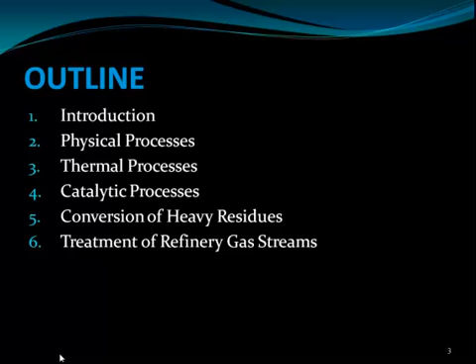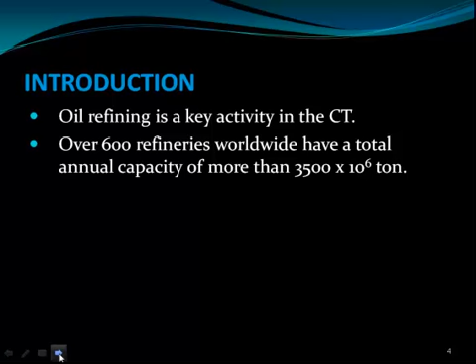Coming to the introduction, oil refining is the key activity in chemical technology, and petroleum is one of the key products. Over 600 refineries worldwide have a total annual capacity of more than 3,500 × 10^6 tons.

The goal of oil refining is twofold. It includes the production of fuels for transportation like petrol and diesel, power generation and heating. Power generation is mainly by burning petroleum products, and heating is required in colder countries. The second is the production of raw materials for chemical technology.

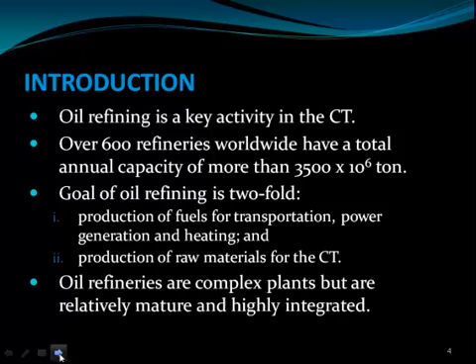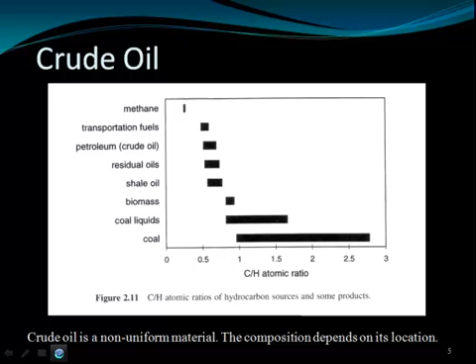Oil refineries are complex plants but are relatively mature and highly integrated. Today technology has advanced so that we can handle very heavy crudes and get more products from the oil refinery. If we look at the carbon to hydrogen atomic ratio, methane is very low whereas coal is very high. Petroleum or crude oils have around 0.5 to 1 carbon to hydrogen ratio. So the carbon to hydrogen ratio should be considered for this energy property.

Next come the constituents of petroleum. Generally the majority of crude oil is alkanes, then cycloalkanes like naphthenes, then aromatics, polycyclic aromatics, and sulfur containing compounds. Gasoline, or petrol, mainly consists of branched alkanes, and diesel mainly has linear alkanes. So among alkanes we have normal alkanes and branched alkanes.

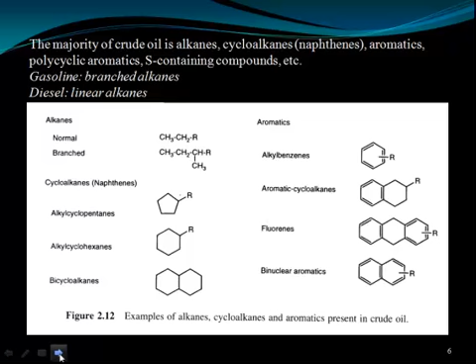The aromatics have the benzene ring, and depending upon the number of benzene rings they are further divided, like alkyl benzenes, aromatic cycloalkanes, fluorenes, and binuclear aromatics. So different kinds of products, mainly aromatic and non-aromatic, that is aliphatic, are present in the crude oil.

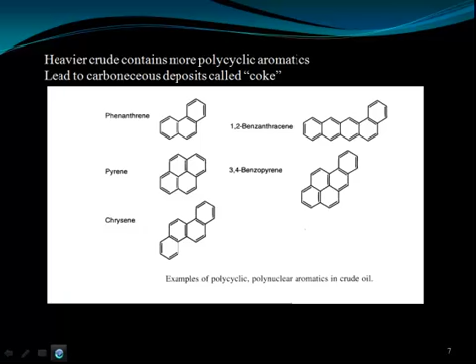Heavier crude oil means higher molecular weight and more polycyclic, polynuclear aromatic compounds, for example phenanthrene, pyrene and chrysene. The heavier crude contains more polycyclic aromatics, and it leads to a carbonaceous deposit called coke. When we burn petroleum, the black soot that remains behind is termed coke in the petroleum industry.

Some crudes contain a lot of sulfur, which leads to processing considerations. Sulfur is a content we generally don't want, and processes are done to remove it from petroleum. The main sulfur compound is hydrogen sulfide, a gas which we can remove easily, but others like cyclic sulfides, disulfides or substituted dibenzothiophenes are difficult to remove. These require the hydrodesulfurization process, where hydrogen is used to remove the sulfur, and the final product is hydrogen sulfide, containing the sulfur removed from the crude oil.

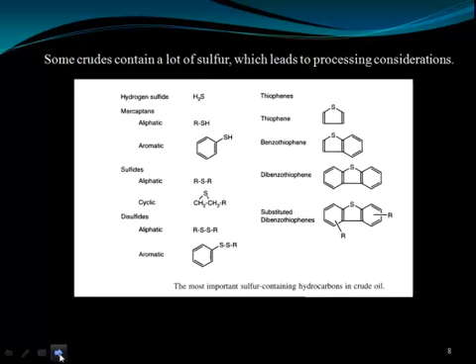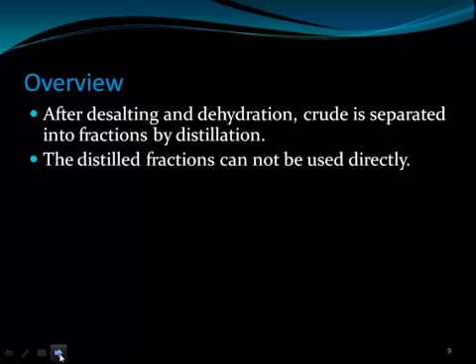Then if we see the overview of the petroleum industry, after desalting and dehydration, crude is separated into fractions by distillation, and the distillate fractions cannot be used directly. The reason for such a complex setup process is the difference between crude oil properties and the needs of the market. Another reason for complexity is environmental. Legislation demands cleaner products and is the major drive for process improvement and development of novel processes.

So desalting, where we remove the salt by filtration, and dehydration, removing the water. Then we separate into the fractions by distillation. So we will see the distillation. What does it mean? The product should be manufactured so that it will have a good demand in market, and it should be sellable in the market. To achieve that, different processes are adopted, which will make the crude oil more adaptable to market conditions.

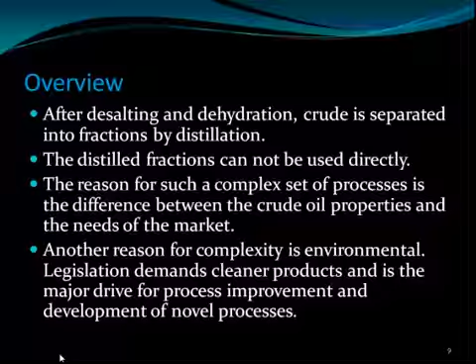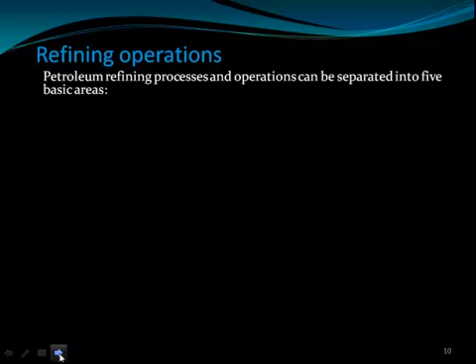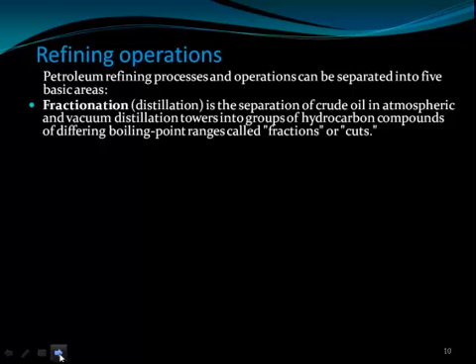In the refining operations, petroleum refining processes and operations can be separated into 5 basic areas. One being the fractionation or the distillation. Here it is the separation of crude oil in atmospheric and vacuum distillation towers into groups of hydrocarbon compounds of differing boiling point ranges called fractions or cuts. The crude oil which comes will separate into different categories or boiling point ranges, generally as petrol, diesel, kerosene, naphtha. These are termed fractions or cuts.

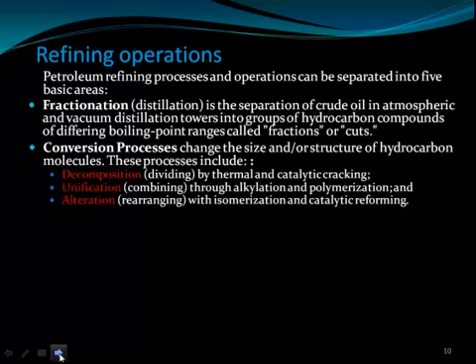The next being the conversion processes. Here we change the size or the structure of hydrocarbon molecules. These processes include decomposition or dividing by thermal and catalytic cracking, then unification, the combining through alkylation and polymerization, and alteration or rearranging with isomerization and catalytic reforming.

Then the treatment processes to prepare hydrocarbon streams for additional processing and to prepare finished products. Treatment may include the removal or separation of aromatics and naphthenes, impurities and undesirable contaminants. The treatment may involve chemical or physical separation like dissolving, absorption or precipitation using a variety of combinations of processes including desalting, drying, hydrodesulfurizing, solvent refining, sweetening, solvent extraction and solvent dewaxing.

So here the things are the fractionation, then conversion and the final treatment or finishing process. In finishing, desalting, drying, hydrodesulfurizing, solvent refining, sweetening, solvent extraction and solvent dewaxing. These are the refining operations that we will discuss in detail in the further slides.

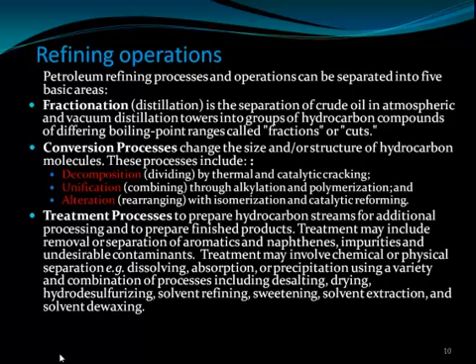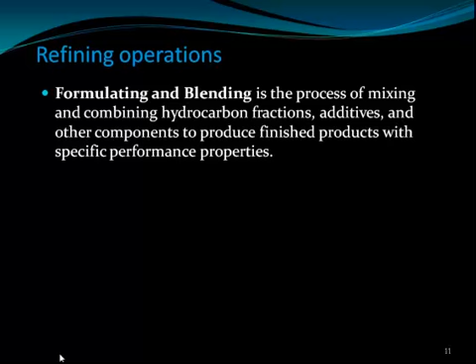In a refining operation, the next thing that comes is formulating and blending. After the treatment process, the products we get, we are formulating and then blending. It is a process of mixing and combining hydrocarbon fractions, additives and other components to produce finished products with specific performance properties. Then other refining operations include light ends recovery, then sour water stripping.

Sour is generally used for the sulfur content. Then solid waste, process water and wastewater treatment, cooling, storage and handling and product movement, then hydrogen production, acid and tail gas treatment, and the last one is sulfur recovery.

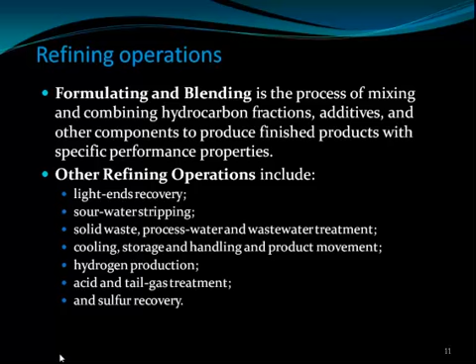The next thing in the refining operation is the auxiliary operations and facilities, which include steam and power generation, process and fire water systems, flares and relief systems, furnaces and heaters, pumps and valves, supply of steam, air, nitrogen and other plant gases, alarms and sensors, noise and pollution controls, sampling, testing, inspecting and laboratory, the control room, maintenance and the administrative facilities.

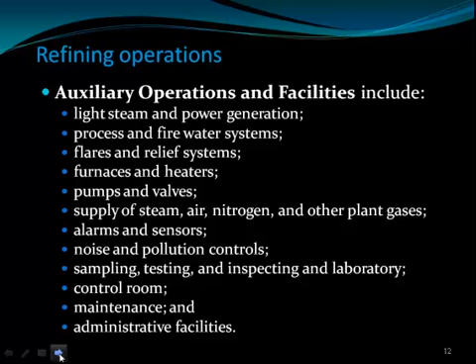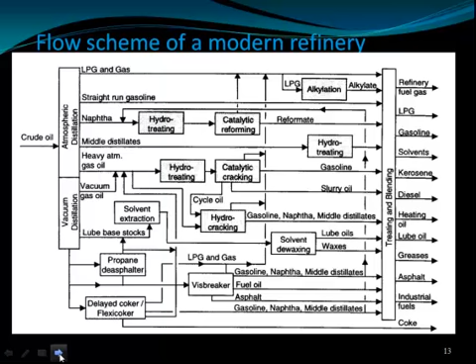So the refinery is a very complex structure where the raw material is one, crude oil, but the outcoming products are very various. This is one of the simple schemes shown here for the refinery. The flow scheme may become very complex depending upon the crude oil composition. If the crude oil is not of good quality, then many other processes have to be included in order to purify it and to get good products of our desired demand.

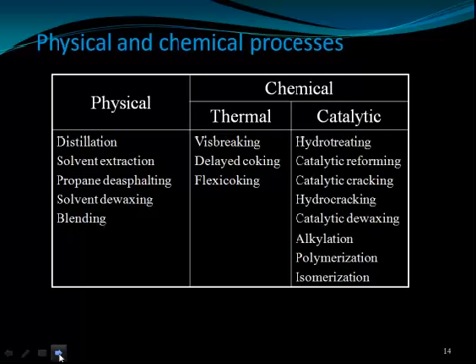There are different chemical and physical processes. Physical processes mainly involve distillation, solvent extraction, propane deasphalting, solvent dewaxing and blending. Chemical we can further divide into thermal and catalytic. Thermal will be visbreaking, delayed coking, flexicoking. In catalytic we have hydrotreating, catalytic reforming, catalytic cracking, hydrocracking, catalytic dewaxing, alkylation, polymerization and isomerization.

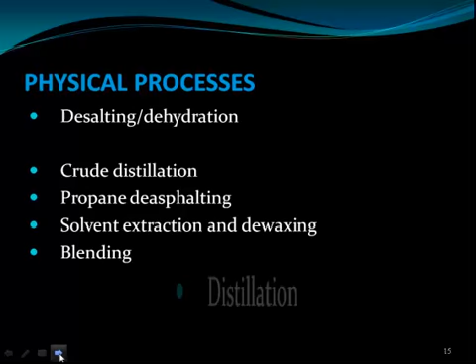Physical processes include distillation. Here we have desalting and dehydration, crude distillation, propane deasphalting, solvent extraction and blending that we have seen. In this one, distillation is the major one that we have to discuss in detail.

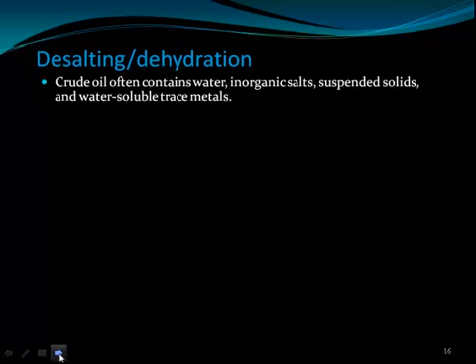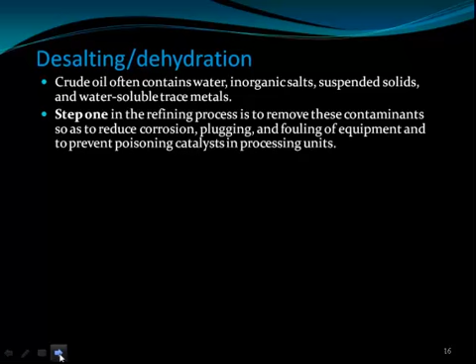As far as desalting and dehydration is concerned, crude oil often contains water, inorganic salt, suspended solids, and water soluble trace metals. Step 1 in the refining process is to remove these contaminants so as to reduce corrosion due to the salts, plugging and fouling of equipment, and to prevent poisoning of catalysts in the processing units. The two most typical methods of crude oil desalting are chemical and electrostatic separation, and both use hot water as the extraction agent.

Most chemicals are water soluble, so we can remove them with the help of water, and if they are ionized we can use electrostatic separation to separate them. So in chemical desalting, water and chemical surfactants like demulsifiers are added to the crude, which is heated so that salts and other impurities dissolve or attach to the water and then held in a tank to settle out.

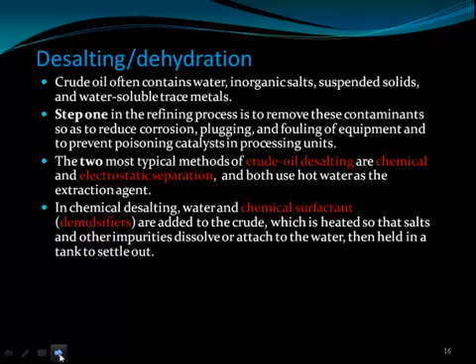Electrical desalting is the application of high voltage electrostatic charges to concentrate suspended water globules in the bottoms of the settling tank. Surfactants are added only when the crude has a large amount of suspended solids. Desalting and dehydration is prior to distillation, where salts, solids and other water soluble trace metals are removed by physical methods in order to avoid problems later. A third, rarer process filters hot crude using diatomaceous earth to remove suspended solids.

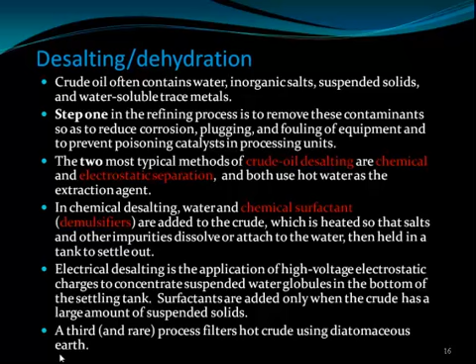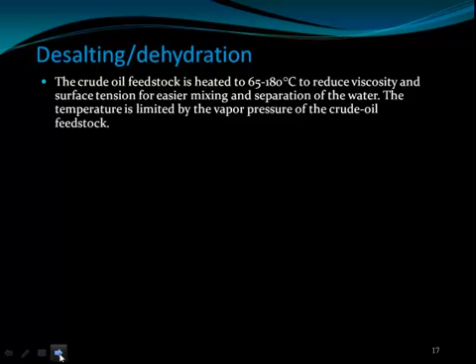We then have the operation which will heat the crude oil feedstock to around 65 to 180 degrees centigrade in order to reduce the viscosity and surface tension for easier mixing and separation of the water. The temperature is limited by the vapor pressure of the crude oil feedstock. So if the crude oil has higher viscosity, we can heat it to a higher temperature to reduce the viscosity, which will make the mixing operation easier.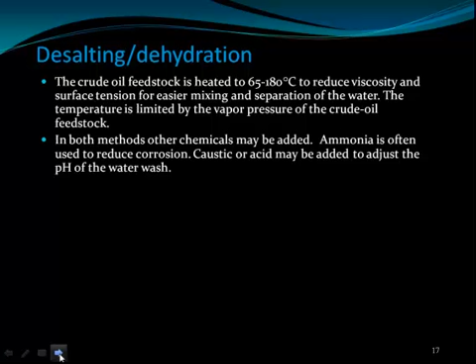In both methods other chemicals may be added, like ammonia, which is often added to reduce corrosion. Then caustic or acid may be added to adjust the pH of the water wash.

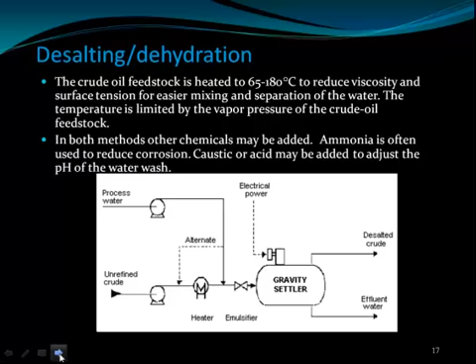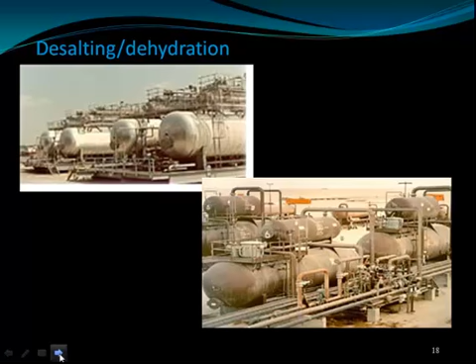So if we see over here, the unrefined crude and water come in. It is heated previously in order to lower the viscosity. Then emulsifiers are added, and then it goes to the gravity settlers where water and crude oil are settled. Then the desalted crude goes to the plant. Here you can see the pictures of the gravity tank settlers - these are round cylindrical tanks in which we allow the crude oil and impurities to settle. They separate by means of their physical gravity differences, and we can get the crude and water separated.

The next step in refining is distillation. Distillation is done after the desalting and dehydration. It is defined as a process in which a liquid or vapor mixture of two or more substances is separated into its component fractions of desired purity by the application and removal of heat.

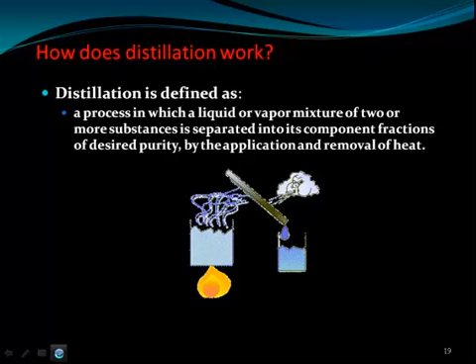Distillation is something you are very familiar with. If you heat something, it will go into the vapor phase, and that vapor when cooled down will give water. Generally this is done to purify water. If water contains some salt impurities, we heat it, so only the water evaporates - the salt and other compounds, having very high boiling points, will not evaporate at around 100 degrees. So water will be effectively evaporated, and then we have a condenser in which we remove the heat from it, converting it back to water that is free of salts. This is one of the purification techniques we learned in science.

The same principles are used in refining crude, but the process here is more advanced than the one discussed. Distillation is based on the fact that the vapor of a boiling mixture will be richer in the component that has the lower boiling point. So when we heat the mixture, the component with lower boiling point evaporates first, and the component with higher boiling point remains in the bottom phase.

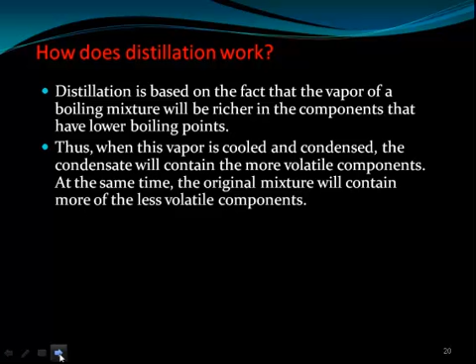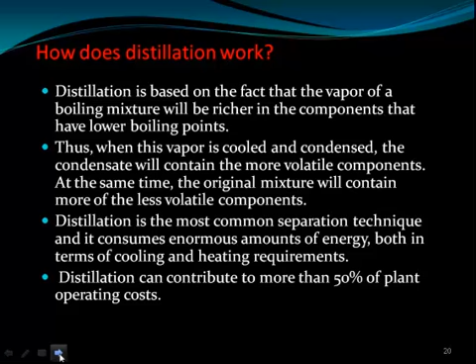When this vapor is cooled and condensed, the condensate will contain more of the volatile components, while the original mixture will contain more of the less volatile components. So the bottom product remains less volatile, whereas the upper product is more volatile. Distillation is the most common separation technique, and it consumes an enormous amount of energy, both in terms of cooling and heating. So in this process we have to do heating as well as cooling, and around 50% of the plant operating cost is spent on the distillation part.

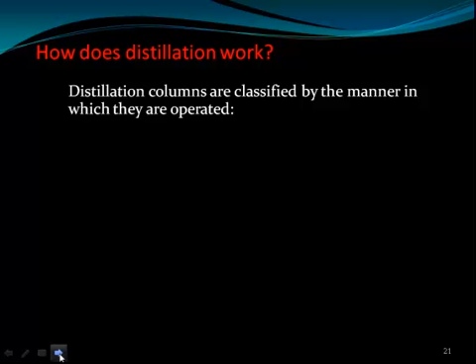Distillation columns are classified by the manner in which they are operated. They are batch wise, in which the feed of the column is introduced batch wise. The column is charged with a batch, and then the distillation process is carried out. When the desired task is achieved, the next batch of feed is introduced.

So in batch, we will get the material at once, have the distillation, and then separate the components. Whereas in the continuous process, the column processes a continuous feed stream. No interruptions occur unless there is a problem with the column or surrounding process units. They are capable of handling high throughputs and are the most common of the two types.

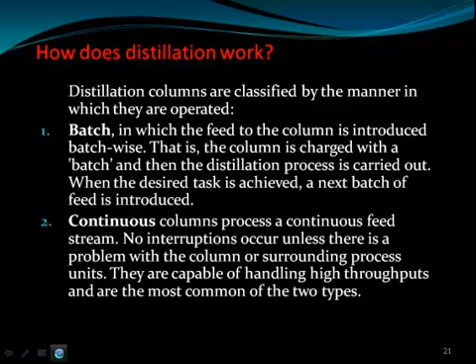So the batch will have the feed at once, whereas continuous will have continuous feeding, but the product volume will be higher in continuous, and lower in batch distillation. So most operations now are based on continuous, because they handle large volumes at one time.

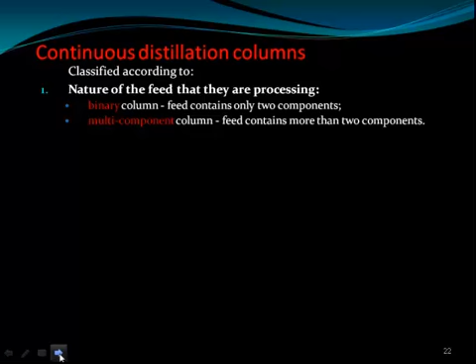They are classified into the nature of feed that they are processing, like binary columns, when the mixture is of two components, and multi-component columns, when we have more than two components to be separated through distillation. Then by the number of product streams they have, like multi-product columns have more than two product streams, where extra feed exits to help with the separation.

So they will have extractive and azeotropic distillation. In extractive distillation, the extra feed appears in the bottom product stream, whereas in azeotropic distillation, the extra feed appears at the top product stream.

In extractive distillation, we add another product which will extract the other component effectively, altering the boiling point. So generally in extractive distillation, the extra feed appears in the bottom, whereas in azeotropic distillation, we mix the azeotropic boiling mixture. Generally, it reduces the boiling point and appears at the top product stream.

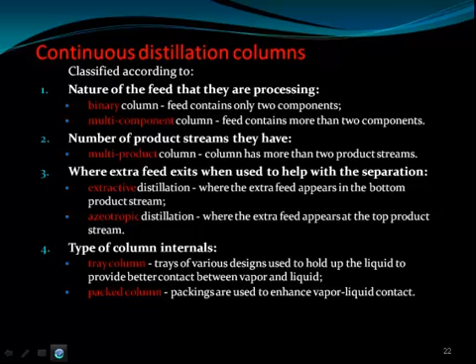Then it depends upon the type of column internals. We have the tray column, where trays of various designs are used to hold up the liquid to provide better contact between vapor and liquid, whereas in the packed column, packing is used to enhance vapor-liquid contact.

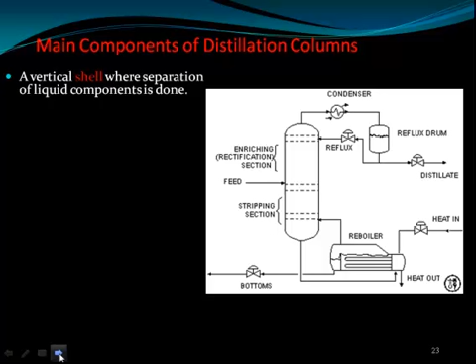So here if you see the diagram, it shows a typical refining distillation column. The vertical shell is where separation of liquid components is done. Then we have the column internals, examples being trays, plates, or packing, which are used to enhance component separation.

Then we have the reboiler to provide the necessary vaporization for the distillation process. Then the condenser to cool and condense the vapor leaving the top of the column. Then we have the reflux drum to hold condensed vapor from the top of the column, so that liquid can be recycled back to the column.

So if you see the tower, the liquid will come in, then feed is fed from the middle of the column. The reboiler will boil it to keep it continuously boiling. The more volatile component will go up in the vapor phase, and it is condensed in the condenser to get the liquid.

Then we will check the composition. If the composition is not of desired quality, we will again send it back to the column, so this reflux operation is taking place. If the product is of desired quality, then we can take it out through the distillate.

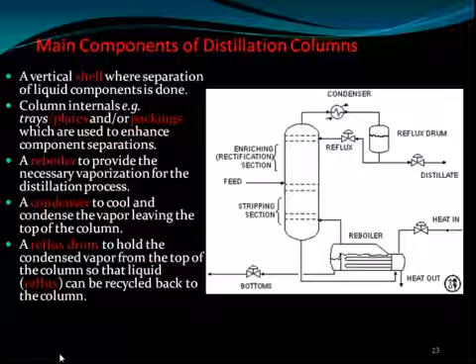Trays and plates are used in the column. In bubble cap trays, a riser or chimney is fitted over each hole and the cap covers the riser. The cap is mounted with a space to allow vapor to rise through the chimney and be directed downward by the cap, finally discharging through slots in the cap and bubbling through the liquid on the tray.

So in this one, the vapor will come up, like the whistle on a pressure cooker where the vapor lifts it up. The vapor will lift the cap and the most volatile component will remain in vapor. Suppose any component mixing has a higher boiling point, it will convert back to liquid and come down again.

This is done to ensure that the vapor has more of the volatile component, whereas the bottom has the higher boiling component. So the vapor is the key which lifts the cap up, and the liquid with the higher boiling point will again get trapped and come down.

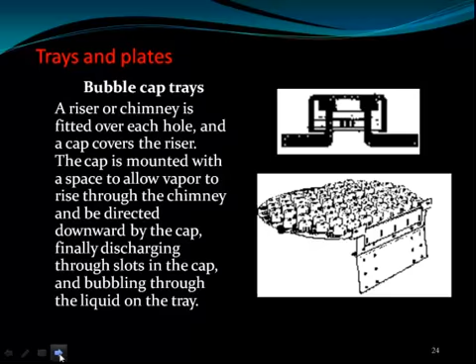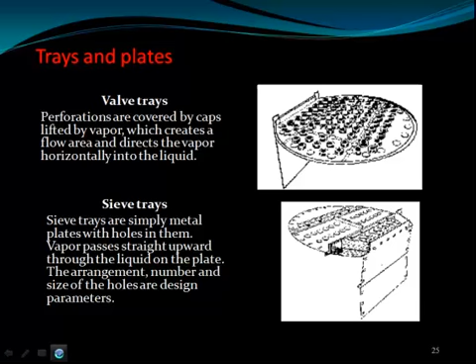Then we have the valve trays. The perforations are covered by caps lifted by vapor, which creates a flow area and directs the vapor horizontally into the liquid. Then we have the sieve trays, which are simply metal plates with holes in them. The vapor passes straight upward through the liquid on the plate. The arrangement, number, and size of holes are design parameters in this one.

If we see the design, the vapor is moving up whereas liquid is coming down. The most volatile component will push up and we find it in the upper stream, whereas the less volatile will come down. So the active tray area will serve as a barrier and will not allow the higher boiling liquid to go up. This is generally done to separate the higher boiling point and lower boiling point mixture completely, ensuring the vapor is more and more rich in the lower boiling point component, whereas the downward flow will have the higher boiling point.

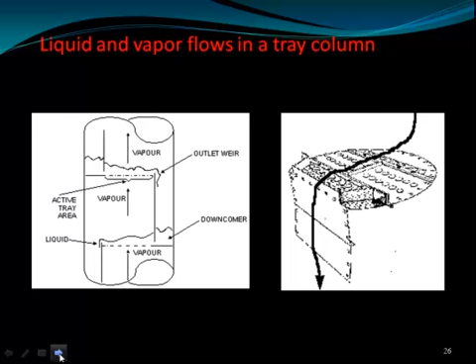In the next diagram we can see the flow of the liquid. The vapor will go up and the liquid will come through the sides of the tray.

Next, liquid and vapor flows in a tray column. Each tray has two conduits called downcomers, one on each side. Liquid falls by gravity through the downcomers from one tray to the tray below, ensuring there is always some liquid hold up on the tray, designed such that the hold up is at a suitable height, meaning the bubble caps are covered by liquid. Vapor flows up the column and is forced to pass through the liquid via the opening on each tray. The area that allows for the passage of vapor on each tray is called the active tray area.

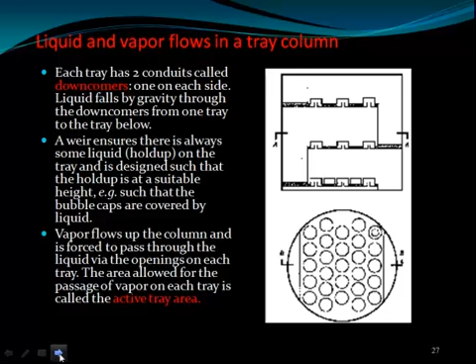Then the next thing we use is packing. As we have seen earlier in fluid mechanics lab, packings are used in fluid flow columns and packed columns. We use the same kind of packing, and nowadays we have very advanced packing which gives more contact area, which is better for effective mass transfer and good heat transfer between vapor and liquid.

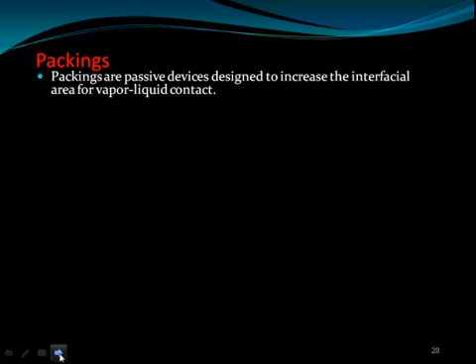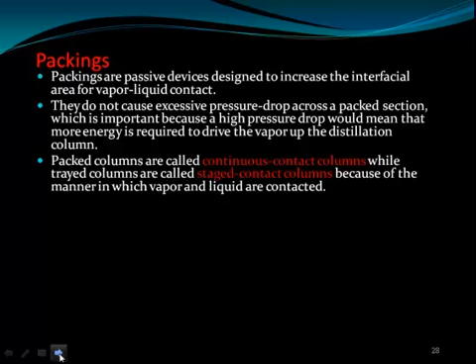Packings are passive devices designed to increase the interfacial area for vapor-liquid contact. They increase mass transfer and do not cause excessive pressure drop across the packed section, which is important because a high pressure drop would mean more energy is required to drive the vapor up the distillation column. Packed columns are called continuous contact columns, while tray columns are stage contact columns, because of the manner in which vapor and liquid are contacted.

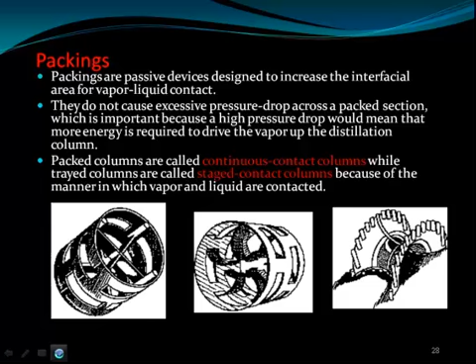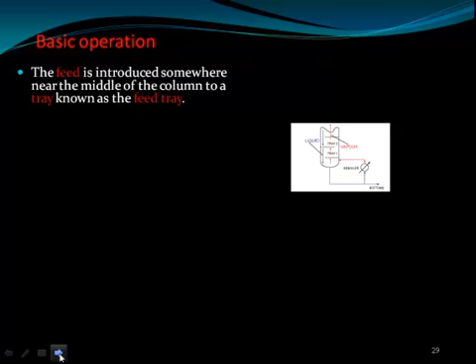The basic operation is that feed is introduced somewhere near the middle of the column, to a tray known as the feed tray. The feed tray divides the column into the top enriching or rectification section and the bottom stripping section. Since feed is in the middle, the upper portion is called the rectifying column, whereas the lower one is called the stripping column.

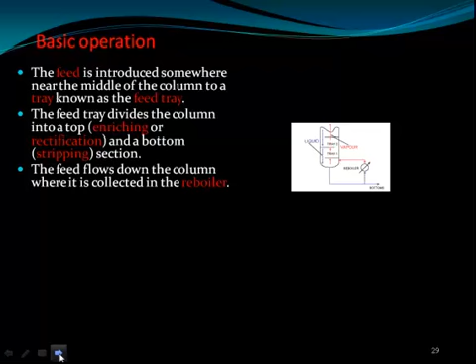The feed flows down the column where it is collected in the reboiler, and heat, usually as steam, is supplied to the reboiler to generate more and more vapor from the mixture. The vapor from the reboiler is introduced into the unit at the bottom of the column, and the liquid removed from the reboiler is known as the bottom product, or simply bottoms.

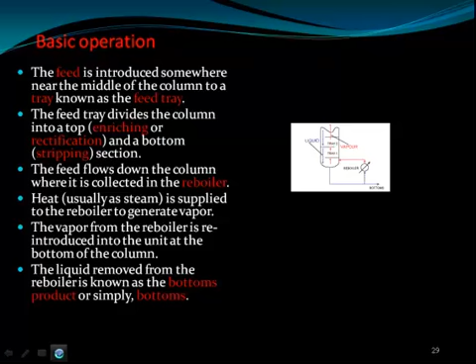The vapor coming up is passed through the condenser in order to liquefy it again, and the liquid which remains at high boiling point at the bottom is called the bottoms in chemical engineering. So the vapor which is coming up will pass through the condenser and go into the reflux drum.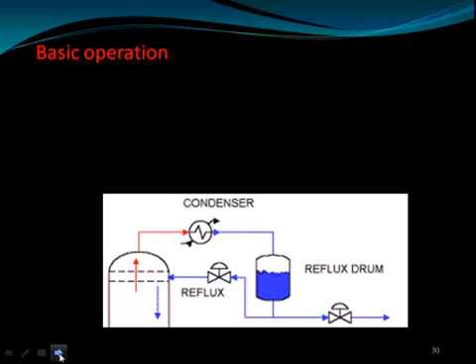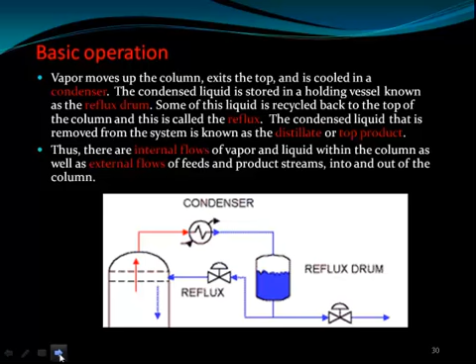The ratio is checked, and if it is fine, we can take the product out, otherwise we reflux it. The vapor moves up the column, exits the top, and is cooled in the condenser. The condensed liquid is stored in a holding vessel known as the reflux drum. Some of this liquid is recycled back to the top of the column, and this is called the reflux. The condensed liquid that is removed from the system is known as the distillate or the top product. Thus there are internal flows of vapor and liquid within the column, as well as external flows of the feed and product streams into and out of the column.